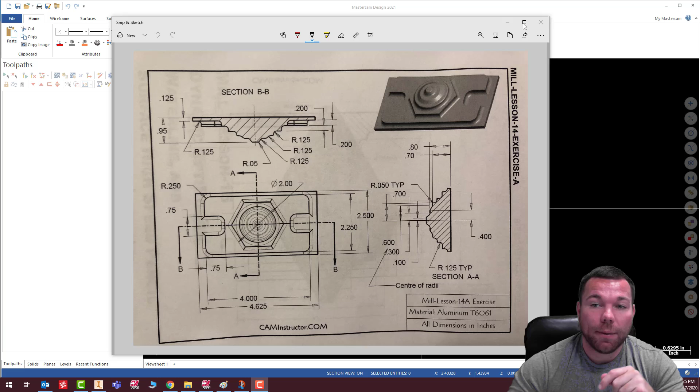In this video, we're going to be going over Mill Lesson 14, 3D Mill Lesson 14, Exercise A. It's this part here that you see in front of you. It's very similar to the tutorial. Let's take a look at this quickly and we'll get started.

We're going to build this the same way that I built the last one. I'm going to do this rectangle shape with some cutouts in it, and then we'll build this hex as well. We'll extrude all those up as add bodies, and then we'll work on this revolve on the top, which is similar to the last part. Very similar. So let's go ahead and get started.

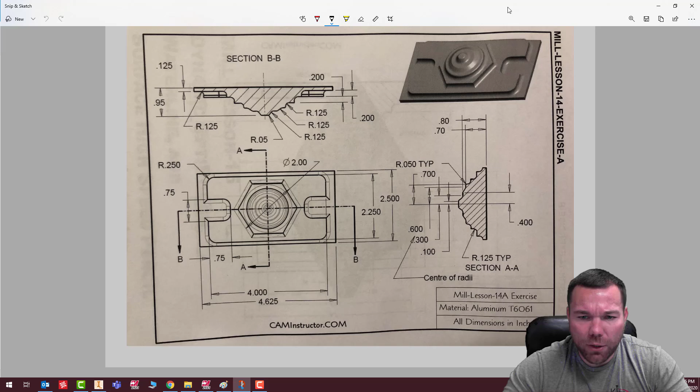It looks like we have the same rectangle that we had last time. So I'm going to go to wireframe, rectangle, anchor to center. Width is going to be 4.625, as it's been pretty consistently with a lot of these parts. Height is going to be 2.5, and check.

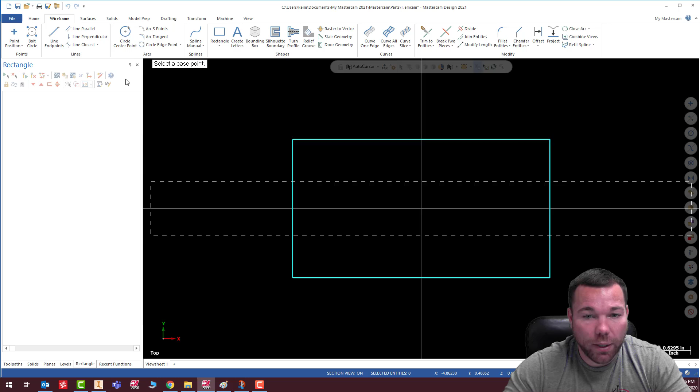Alright, so that's done. And the next one looks like we have 2.25. I'm actually going to draw this as a rectangle as well. 2.25, it's not the width, 4 inches is the width, 4.0. 2.25 high, and hit check.

Okay, looks like we have 1/4 inch radii around the edges of this, so let me do a fillet chains, and let me put that radii on there.

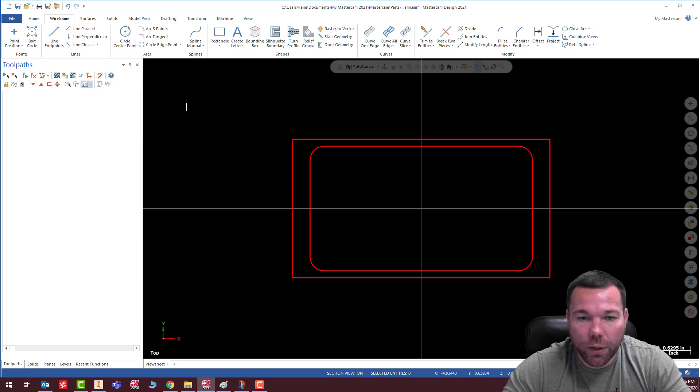Alright, now we have to do these little cutouts in here, so I'm going to add those in. It looks like they're 3/4 inches by 3/4 inches, so not too difficult there. Actually, I should have waited to do that quarter. So I'm actually going to undo that.

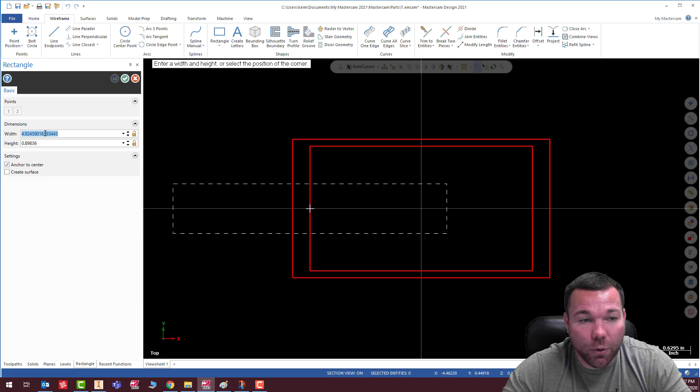Let's go ahead, and I'm actually going to make this really easy on myself. I'm going to anchor this to the center, and since it's 3/4, I'm going to do a height of 0.75 by... actually, you know what, we can even do this, which is even cooler. Let's undo that. Let's go to our rectangular shapes, do a rectangle, 0 fillet.

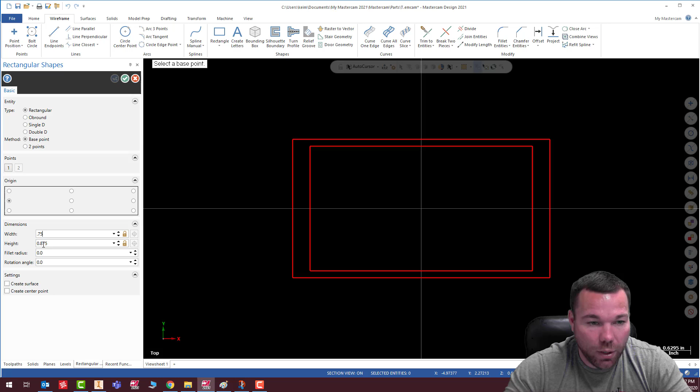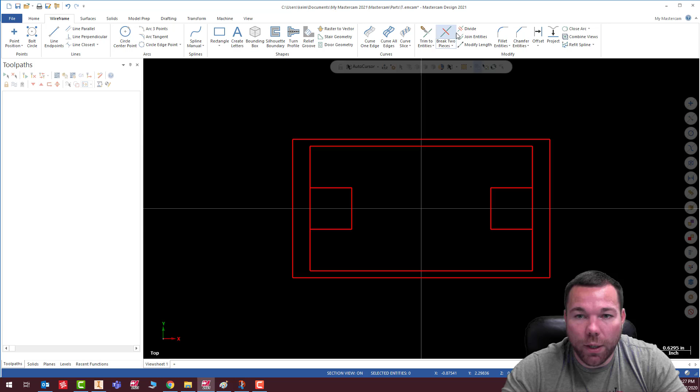And we'll do this and do 0.75 by 0.75. Done. Change the amount. Oops, should have locked it. 0.75 by 0.75. Check. Okay, and what I'm going to do is just divide this one, this one.

Okay, so there's my shape, and now that I have this whole shape, I'm going to add those fillets in again. Well, I guess I shouldn't have done that, because now it's going to fillet these corners. So now I have to do it manually.

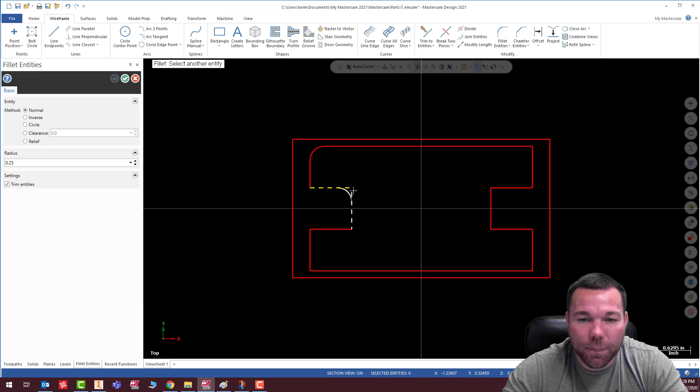Yeah, I didn't think far enough ahead. It happens sometimes. But no worries, there we go. Okay, so we got our shape.

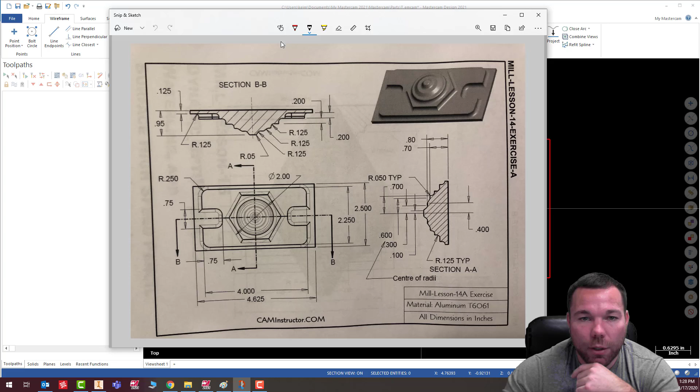Next, we need to do a hex. So we have this hex, so we're going to pick our polygon, and it looks like we have a circumscribed circle in here. So we're going to go ahead and pick polygon, 6 sides, and we want to make that radius, looks like 2 inch diameter, 1.0. And that looks pretty good.

Well, interestingly, no, there is an issue here, and let me point this out so you can actually see it. That circumscribed circle is including the radius. So we know we have an 1/8 inch radius, which means that's actually a 1/4 inch bigger. So we need to subtract a 1/4 from that, or an 1/8 inch from the radius here. So we're going to make this 0.875, and that will be the correct size. Yeah, that's right. Alright, so let's go ahead and hit our check button.

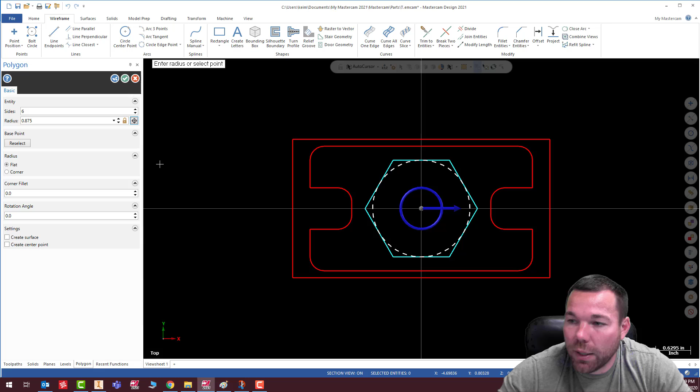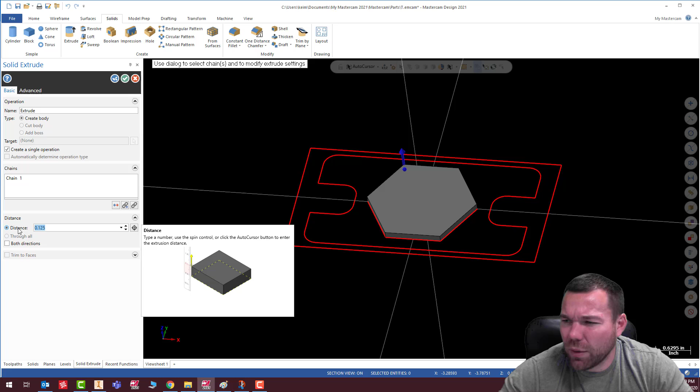Alright, so now we can go ahead and extrude these solids. Extrude this, check, and that's going to be 0.525. Okay, check. Extrude this one. This one's going to be 0.325.

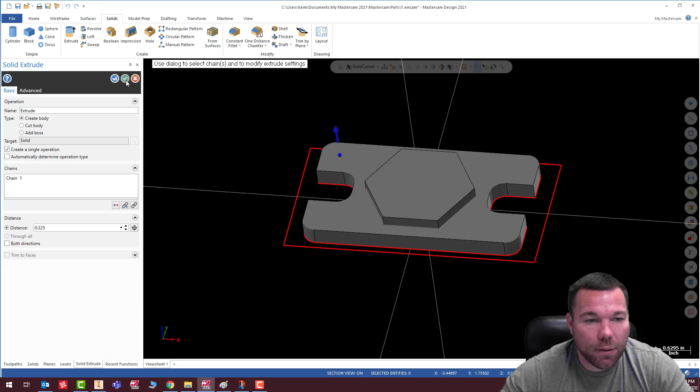That's going to be an add. Check. And the next one is here, and that's going to be an add as well. 0.125. Enter. Check. All right, so that looks pretty good.

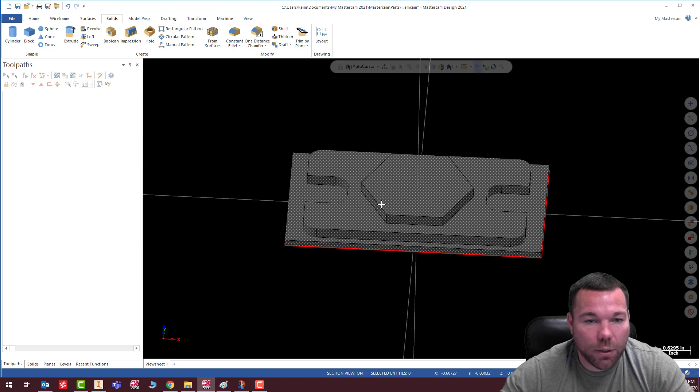One thing I am going to do, and I forgot to do in the beginning, is I want to create my solid there. I'm just going to click on that, right click, send that to the solid level, check, and that looks good. Okay, all right, so that is created.

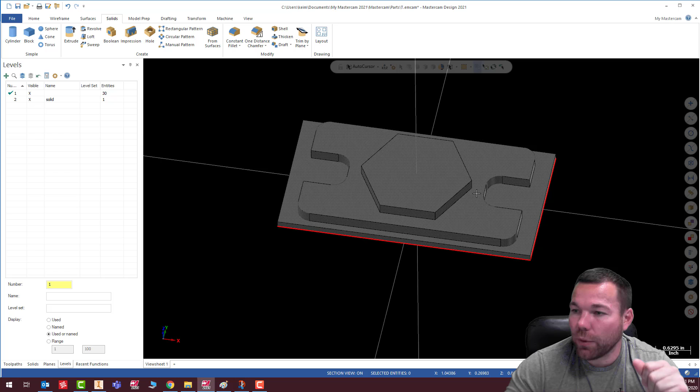Now if I bring this back over, it looks like we need some radii. So we need an 1/8 inch radius, 1/8 inch radius. It would appear in all of these. So let's go ahead and add those in a while. I could wait, but I like to get them in there. So let's get that one.

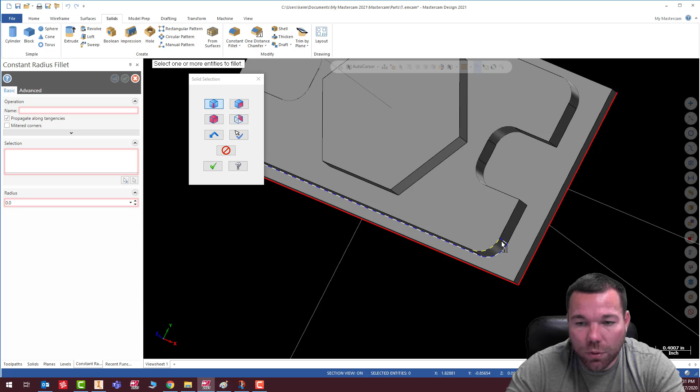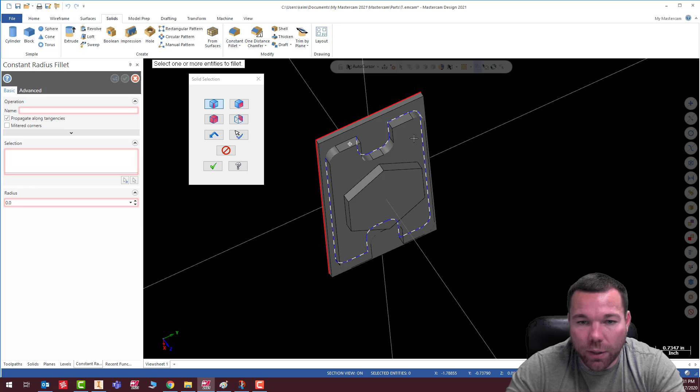That's a pain selecting all these things. Check. All right, and that's a 125 thousandths radius, so I'm gonna put 0.125. Tab. That looks much better there than what I did have. So let's go ahead and hit check.

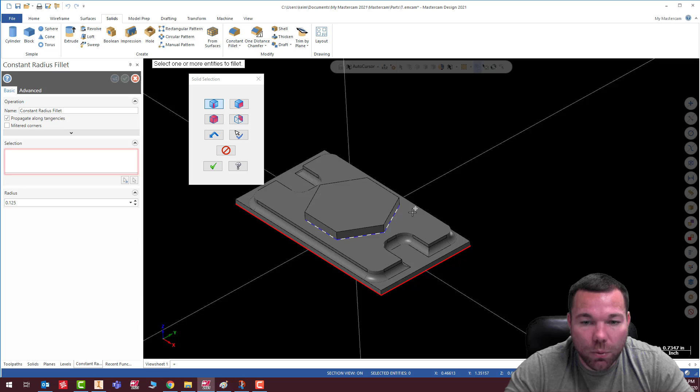And add this one. Check. Okay, so there we are. So there's our basic shape for the bottom.

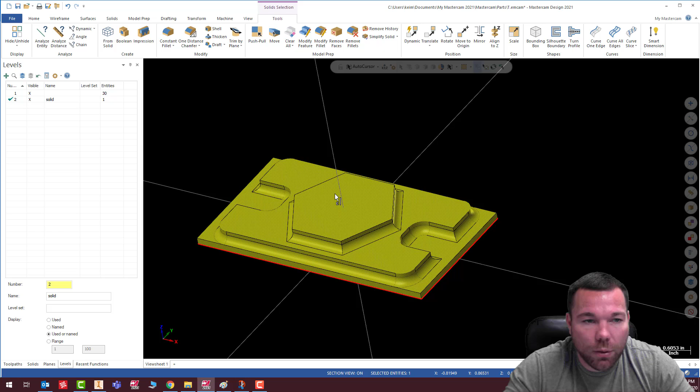Now we're going to go to the front plane, and we're working on this one. Let's go to the front plane and start drawing this stuff. To start out, I'm going to draw my lines again like I did last time. I'm going to go from point, check that, 0, 0.525 up to 0, 0.95, and hit check.

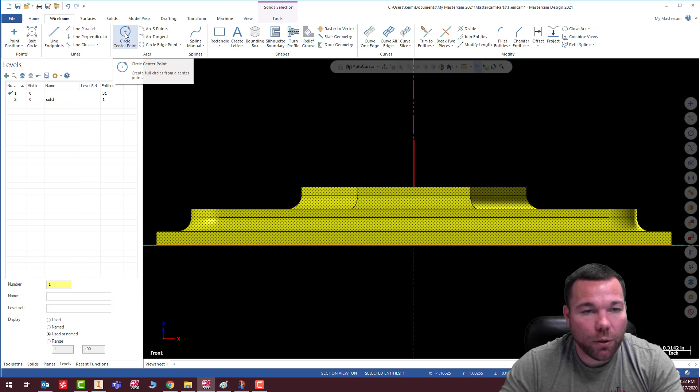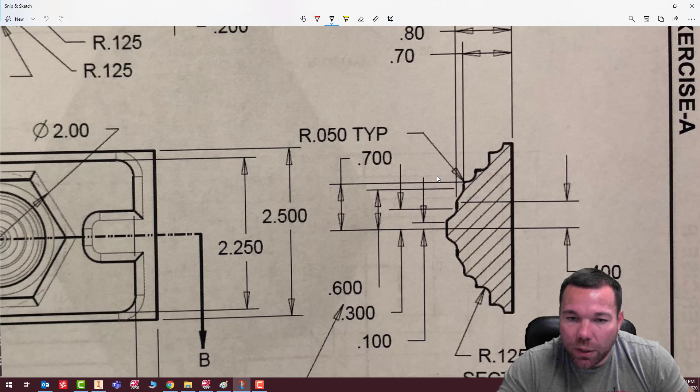Let me bring this drawing up again. It looks like our distance is 0.7 to there, so 0.7 to the straight line. Let me zoom in on that a little bit. It's 0.7 to the straight line, so it's basically 0.7 in the x. Let's bring that over here quick. Straight line, 0.7, comma, 0.525. And I just draw that straight up.

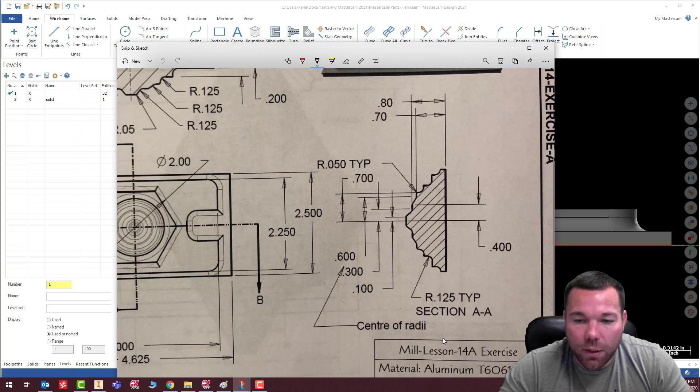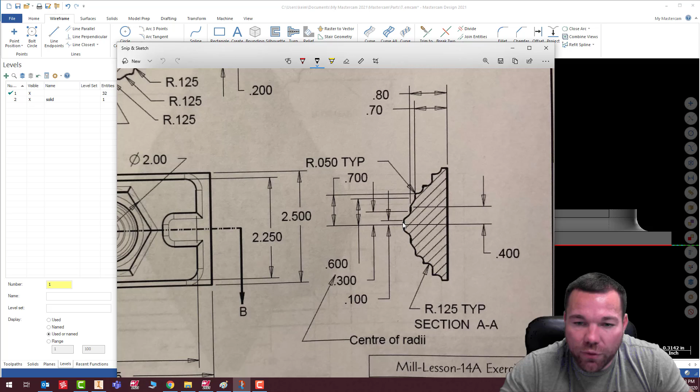All right, so let's go ahead and work on getting some of these radii. It looks like, again, as usual, the internal radii are 0.125 and the externals are 0.05. So let's draw this first external radius, which is 100 thousandths to center. So let's go ahead and make this 0.05. Tab. Oops, wrong thing. All right, so we got 100 thousandths to center. 0.1, comma, 0.9 is going to be the center of that one.

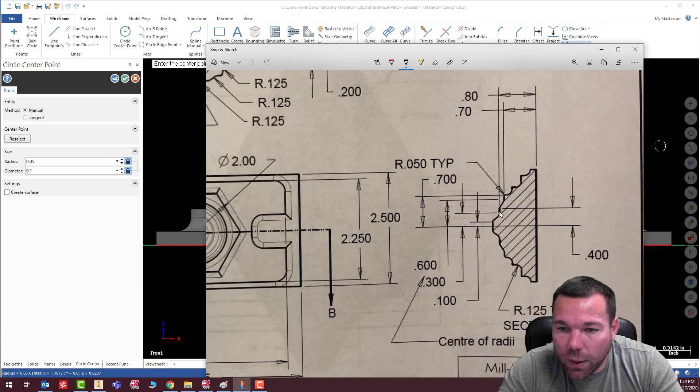The next one, that's an internal. That is an external, so 0.4 and 0.75. So 0.4, 0.75. 0.4, comma, 0.75.

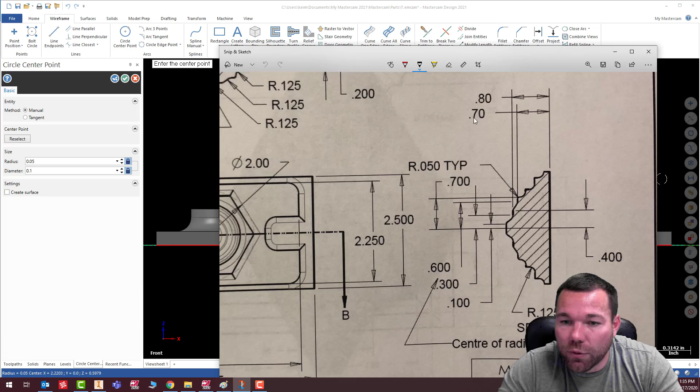And the next one looks like it's on the edge here. So that's going to be 0.7, well, 0.7 minus 0.65, 0.65. I think I screwed up here, actually. I did. 0.65, 0.6, yeah, 0.65, 0.65. Okay, that's easy enough. Center point, 0.65, comma, 0.65. Oh, gotta click in here. 0.65, comma, 0.65, enter. All right. So I didn't screw up there. I actually did have it right.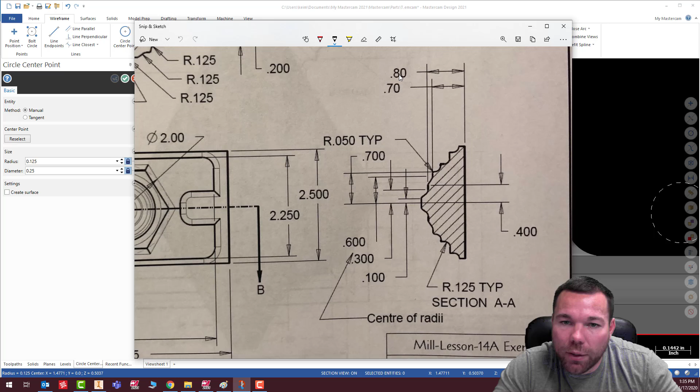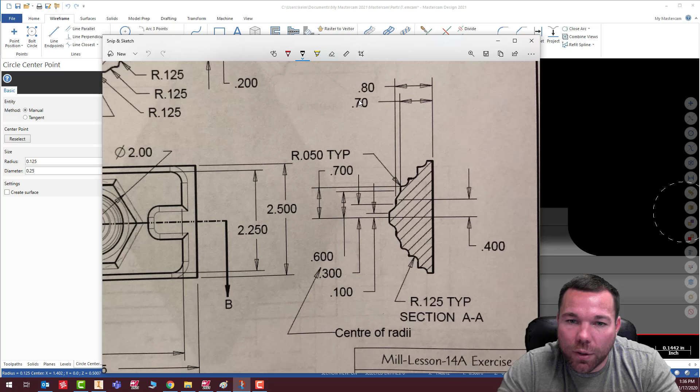Check that one, and we need to do 0.125 radius now. Let's see where those are located. So we have one that is right here at 0.3, comma, 0.925. And let's see where our other one is at. Our other one is at 0.6, comma, 0.825. Enter. All right, so it looks like we got everything there.

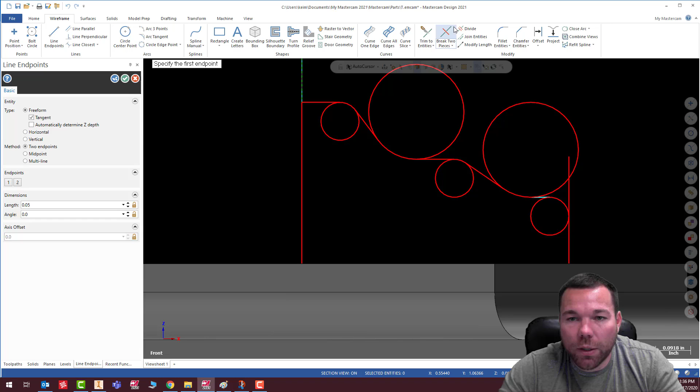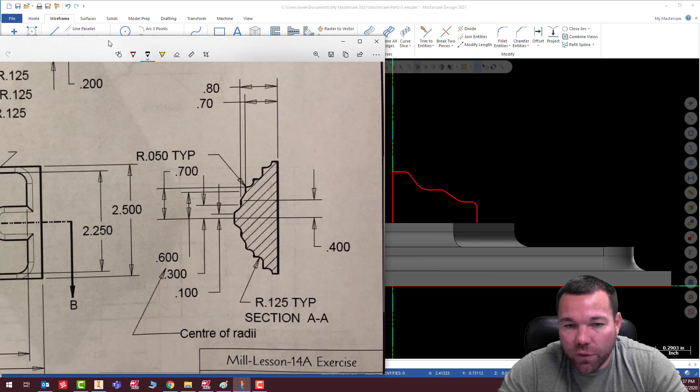Let's go ahead and connect these. Okay, let's trim some stuff up. Oops, undo that. All right, so there is our basic profile. Let's just see, does that kind of look like it? Yeah, it does. All right, so I'm satisfied that that's correct. I do need to connect these two at the bottom. So that looks good. Check, and let's go ahead and revolve this.

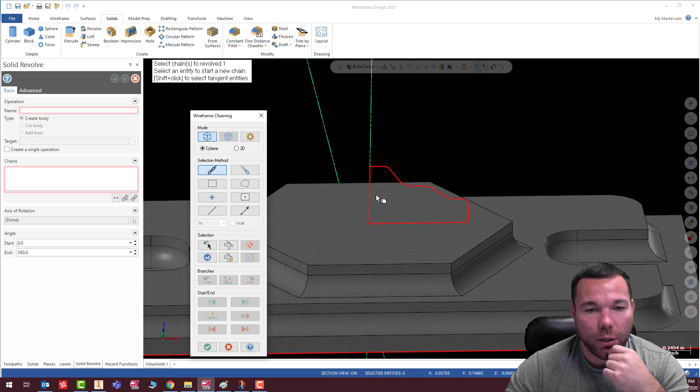Revolve, and select that. Check. Revolve this way as a boss and add. I didn't do this last time, so I had to boolean it. Just forgot. So go ahead and hit check.

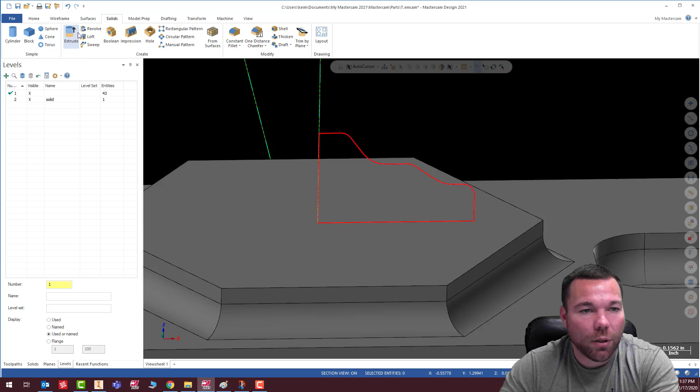Uh-oh, we might have an issue with the geometry down here. I don't know if I actually connected that or not. Check. All right, let's try that again. Solids. I thought something looked a little funky when, yeah, there we go. I think that's going to change everything. Yep, so it's an add body. Check.

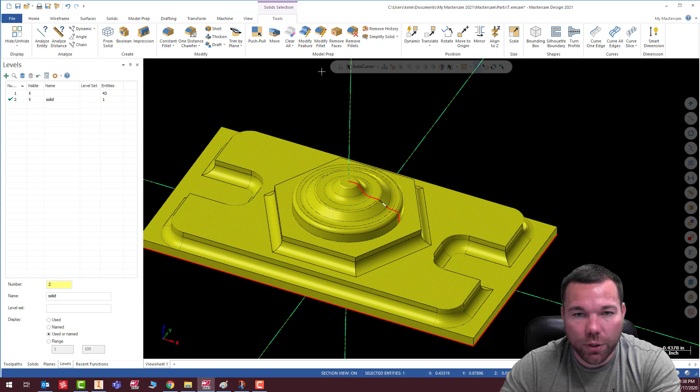All right, so that looks good. Let's just create our radius, just right there. Check. 0.125 looks good. And I'm going to turn my geometry off. And now I have my solid.

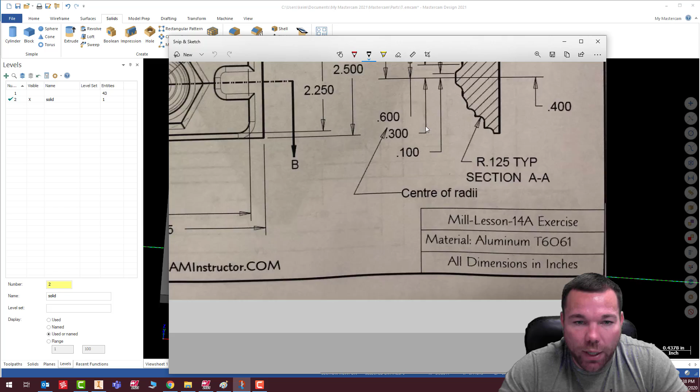I don't think it's actually asking for any radii on these corners, let me zoom out here. So I'm going to leave them square, unlike the tutorial. Even though the tutorial didn't ask for it, I put them on there anyway. You can see it's pretty much, it doesn't have them on this one. So I'm going to leave them off.

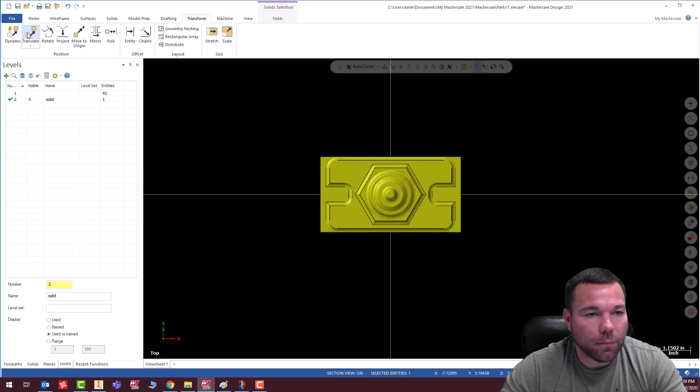So I'm going to go to top, and we're going to go to transform, translate: 2.3125 comma negative 1.25 and negative 1.0. Enter. That is good, and hit check. Yes, I do want to move everything.

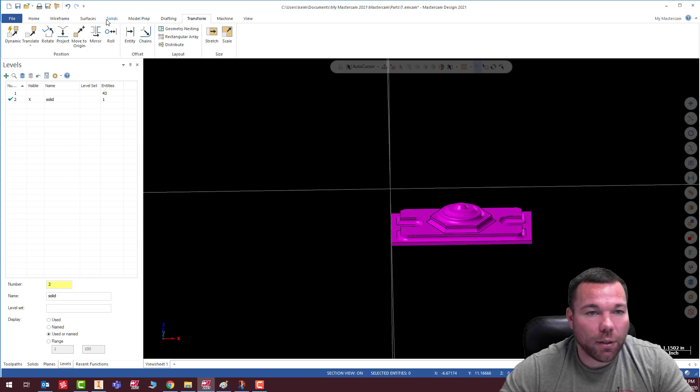Let's go ahead and create a wireframe bounding box. And I'm going to select this and selection, and we're going to make that 1.0. Check. All right, so there's our bounding box. I didn't need to make that 1.0, I just did anyway.

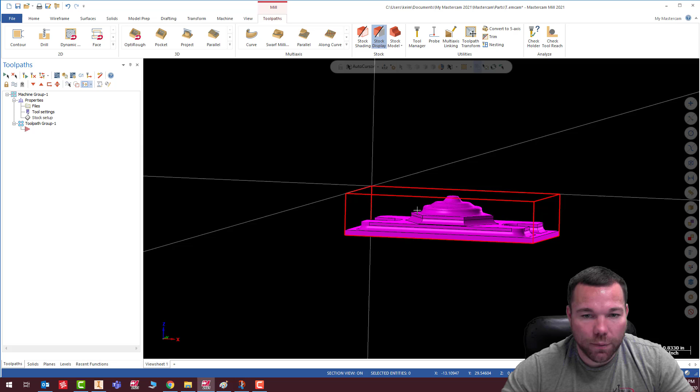Toolpaths, let's go ahead and select our machine. Stock setup, all entities, that makes it nice and easy. Check. All right, so there's our stock. Can't see it because it's around the bounding box, but that's fine.

Next, we are going to do our pocket toolpath. I'm going to triple click and get everything here in selection. Containment boundary is going to be here. Check. Check.

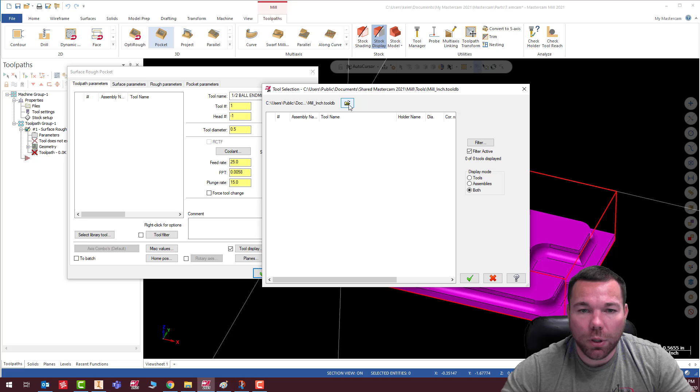Select my tool, and I'm going to get an aluminum tool, bull mill, 1/2 inch with an 1/8 inch radius. We're going to go 100 inches a minute, 12,000 RPM, 30.0 in the plunge rate.

Surface, we're going to work on the outside because we want it to go outside of that bounding box, or to be able... basically, it's telling you it can go outside. It's not saying it has to stay inside of it. So it gives it permission if it has to go outside to get like these edges over here. I can't rotate right now, it just beeped at me.

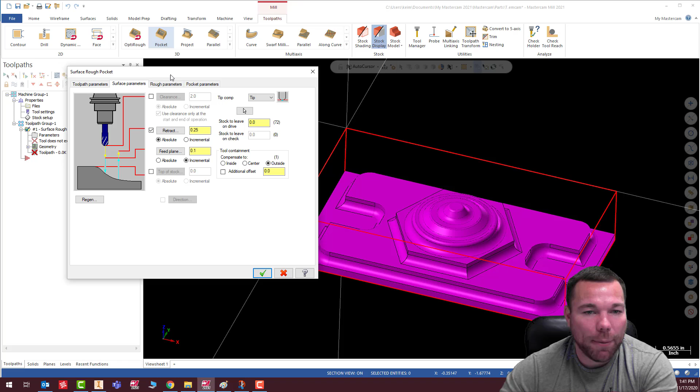Stock to leave on surfaces, let's leave 10 thousandths on. Roughing, max step down, 0.1's fine. I'm okay with that, I could probably go a little more, but I'll leave it at that. Helix entry's fine. Depth cuts, absolute. I don't need to turn this on, but I am going to anyway.

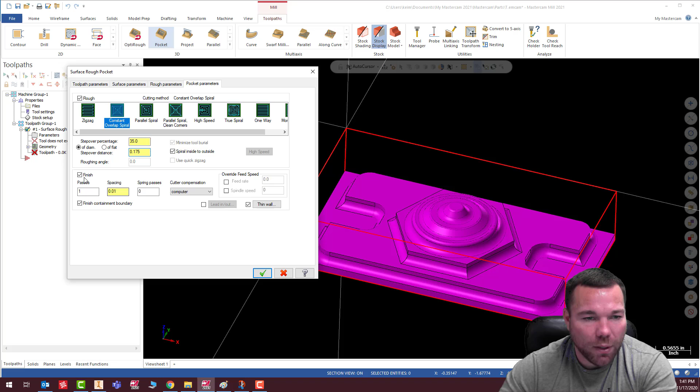Detect flats. Check. And pocket parameters, we're going to do a constant overlap spiral, and we're going to step over about 35%, and turn my finish off, and it's going to beep at me because I do that. Yes. Now, one thing I didn't change in here, I didn't change in the last video, I'm going to turn off that spiral inside to out. All right.

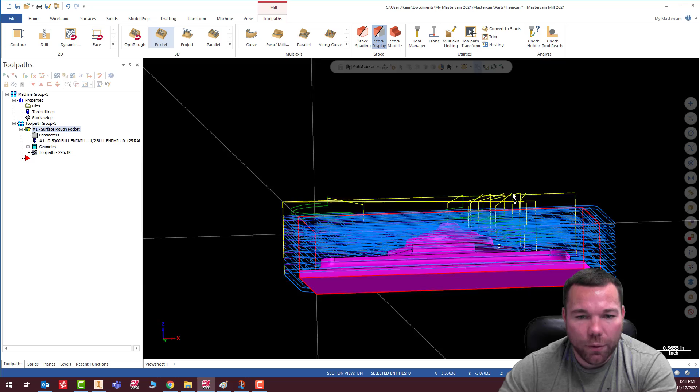So there we go, so let's take a look and see how that does. Okay, so that's pretty good. That has to do with the step down, by the way, that's why it's leaving that little bit on there. So I'm pleased with that.

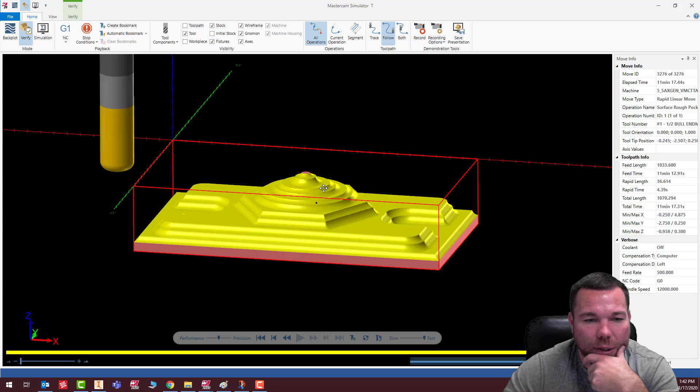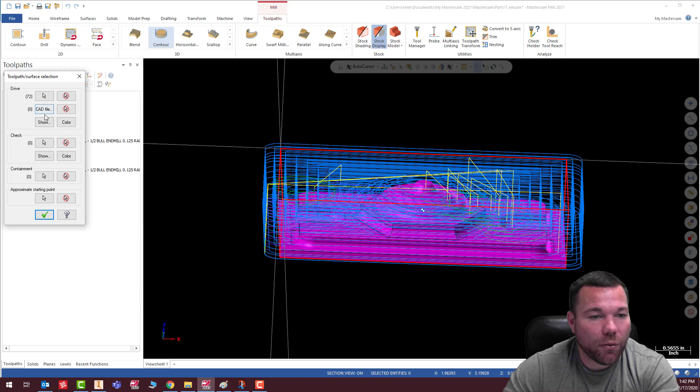So let's go ahead and finish this. So we're going to do a contour and triple click and selection. And once I have those selected, I'm going to contain the same way and hit check.

Select a different tool, we're going to use a 3/8 with that 32nd on it again. Feed rate 100 inches a minute, speed 12,000, and a plunge rate of 30.0. Surface, everything there is good. We're taking everything off, we're allowed to go outside.

We want to do high speed, we want to do a shallow, we're going to add cuts. Minimum step down 0.005, actually I'm going to make that 2. And do check. And I'm going to turn flats on as well.

And I'm going to make this 0.1 actually. And depth cuts, we're going to absolute. Auto detect flats, there we go. Check.

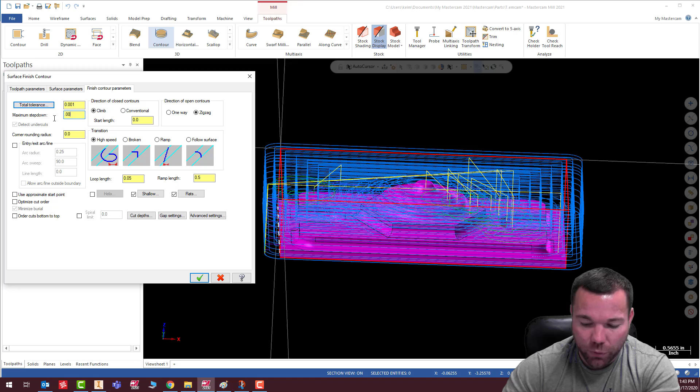And our max step down, we're going to make this 0.005, and we'll do one way. Check it. All right, let's see what that gives us. Okay, so that looks pretty good. Let's take a look and see what we got.

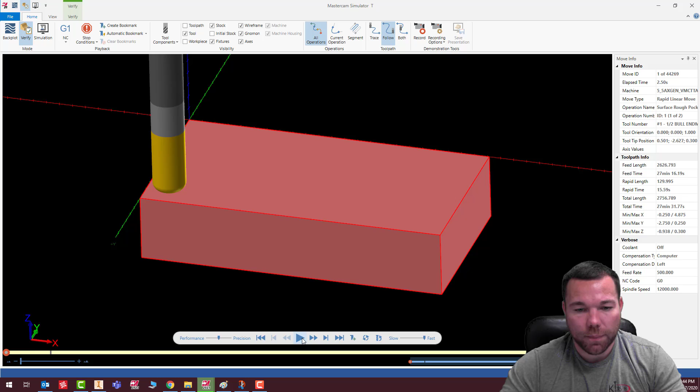Not bad, not bad at all. So there we are, there is our finished part.